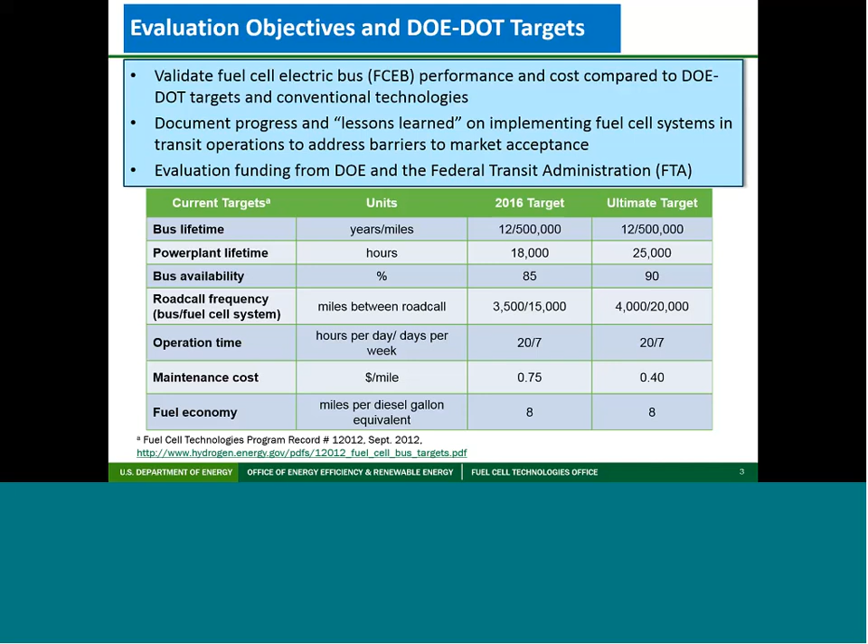We document for other transit agencies the lessons learned, hopefully so that new agencies that are interested in this technology can avoid some of the pitfalls from some of the early adopters. And I'm going to go through data as we move forward that talk about these targets, such as power plant lifetime, availability, the frequency of road calls, and maintenance cost and fuel economy.

Our approach is we're basically a third-party evaluator. We work with the transit agencies, and most of the data we get comes straight from the transit agencies and then some from the manufacturers. We include comparisons to the conventional technologies. In most cases, that's diesel, but some of our fleets don't have diesel baseline buses, so we look at CNG. Occasionally, we'll have diesel hybrids as a baseline as well.

We work with each of the individual sites, and we collect data and then document their experiences, and that builds a database of a number of data items that we have from all these fleets. We publish the individual reports, and then once a year we do an annual status report where we look at the data from all those sites and sort of assess the progress and look at what maybe needs to happen for the technology to continue on that line toward commercialization.

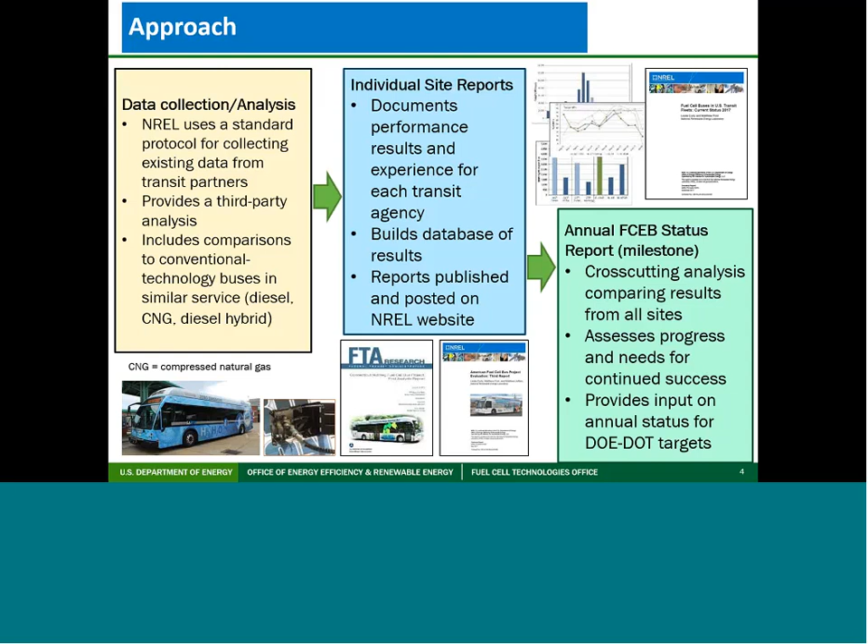So the next few slides, we're going to talk about a data summary from our most recent data. This will also be included in my annual merit review presentation in June. We've got two different manufacturers that we've been working with so far, and this table gives you some specifications from those two manufacturers. One design is a Van Hool-based bus. The power plants were originally designed by UTC Power, and they have a fuel cell dominant system with a Siemens ELFA hybrid system using EnerDel batteries.

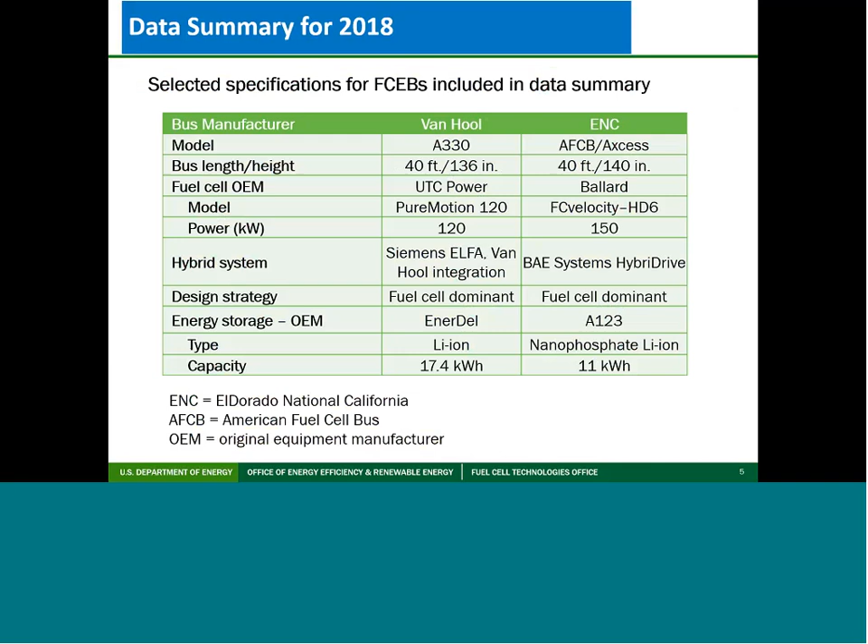The other design that we're looking at is built by ElDorado National on their Axess platform, and that bus was developed under the FTA program, and it's dubbed the American Fuel Cell Bus, which is the AFCB acronym. And that one has a BAE hybrid drive system with a Ballard fuel cell, and it's also a fuel cell dominant system with A123 batteries.

This table shows you the fleets that we've included in the data summary. We've been working with 6 fleets over the last few years, but we don't have data from all those fleets in the following data products. So this shows you who we've been working with, how many buses they have, what design it is, and what data is included.

We've followed the AC Transit buses for 6 or 7 years now, so we've cut down on the data that we've collected on them. It's mostly the fuel cell hours, but we've also included the fueling records, and on the reliability chart we've shown their miles between road call as well.

We have all data on Sunline and Orange County Transportation Authority, and then in the UCI there's a bus at the University of California at Irvine, and then the MBTA bus, we don't have a full data set on those, so that includes fuel cell hours and their fueling records.

And then Stark is our newest fleet. We have not selected a clean point for those yet, so right now we only have the fuel cell hours, but we've got about 4 or 5 months worth of data on those, so they will show up in our next data reports. And I've got the numbers beside the fleets showing our evaluations are funded by either DOE or FTA, and I've indicated which ones are funded by which.

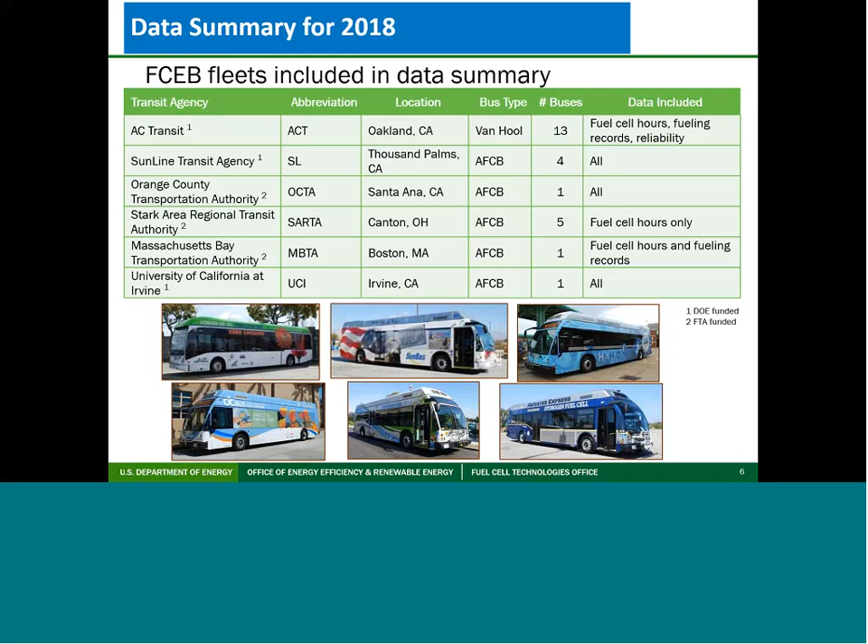So this chart shows you the growth of fuel cell buses in the U.S. over the past few years. We started evaluating some original prototype buses back in 2005, and we're seeing some of those numbers climb now. The nice thing is that the new bus orders are following the standard procurement process, which is definitely needed to have a commercial product. Right now we have 33 fuel cell buses in service.

We are not collecting data on all of those. And then potentially by the end of 2019, once orders that are on the line come through, it could be 71 buses. And I have a note at the bottom about the European fuel cell programs. From the notes that I've seen, we have about 46 active, and there's 313 planned in Europe. And then Asia is also planning some larger fuel cell bus programs. I've seen as many as 400 planned, and with the potential for as much as 2,000 more per year in Korea.

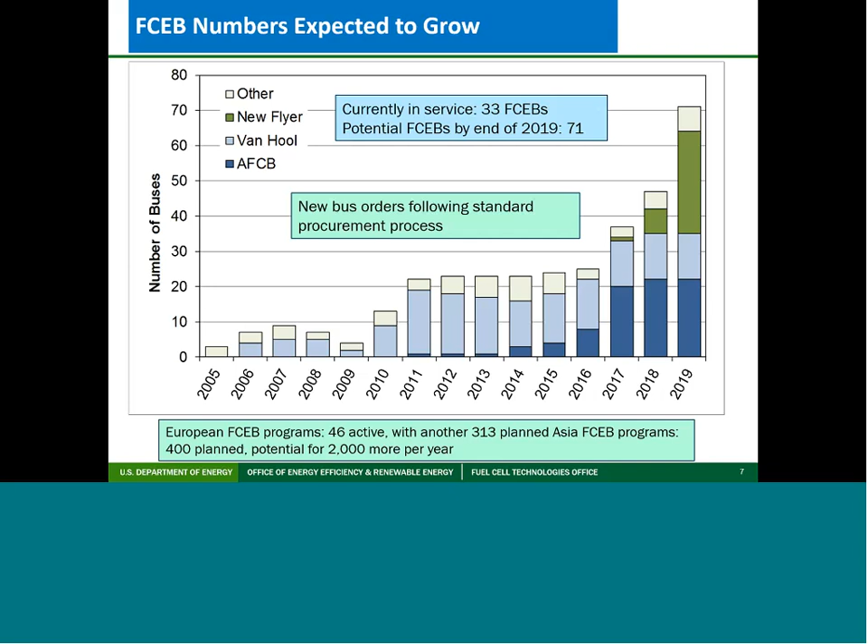One of the most important things to look at is the longevity of the fuel cell power plant. This chart shows you for each of the buses that we are working with, the number of hours that the buses have achieved as of the end of February 2018. There's an interim target of 18,000 hours, and the ultimate target is 25,000 hours.

The idea is that the 25,000 hours will take a bus through half of its life, and then similar to what they might do with a CNG or a diesel bus where they might do an engine rebuild or an engine refresh, the thought would be that that would take the fuel cell to a point in time where they might want to refresh or replace that power plant.

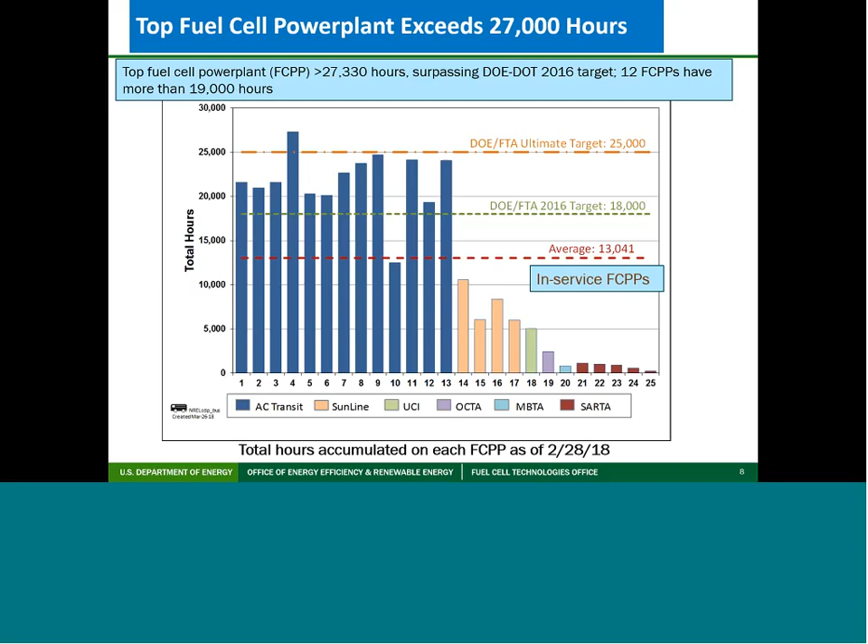We've seen 2 buses now that are over the ultimate target as of March. So I have some more data. This is through February, but we've seen 1 bus go over 27,000 hours, which is a huge accomplishment for these buses. You can see that some of our newer buses have come online, and so they don't have nearly as many hours, and the average for the group as a whole is over 13,000 hours.

Fuel economy, we track in-use fuel economy, but we developed this product last year for our last status report to look at the different designs that we've looked at and the first generation versus second generation. So these box plots show you the first year of data at each demonstration. Fuel economy is very dependent on duty cycle, so to get these numbers we looked at each of our demonstrations, took the first year worth of data and the average fuel economy for the buses for that whole year. So that would also include any summer versus winter driving.

The first generation buses, there were 6 demonstrations of 3 different fuel cell bus designs, and the Gen 2 are 5 demonstrations of 2 different designs. And you can see that from the first generation to the second generation, we've seen a fuel economy increase. And I did put a note on here that the low point of the Gen 1 is the only bus that we've looked at that was not a hybrid electric bus. It was just a strict fuel cell bus, and it got worse fuel economy than the baseline buses.

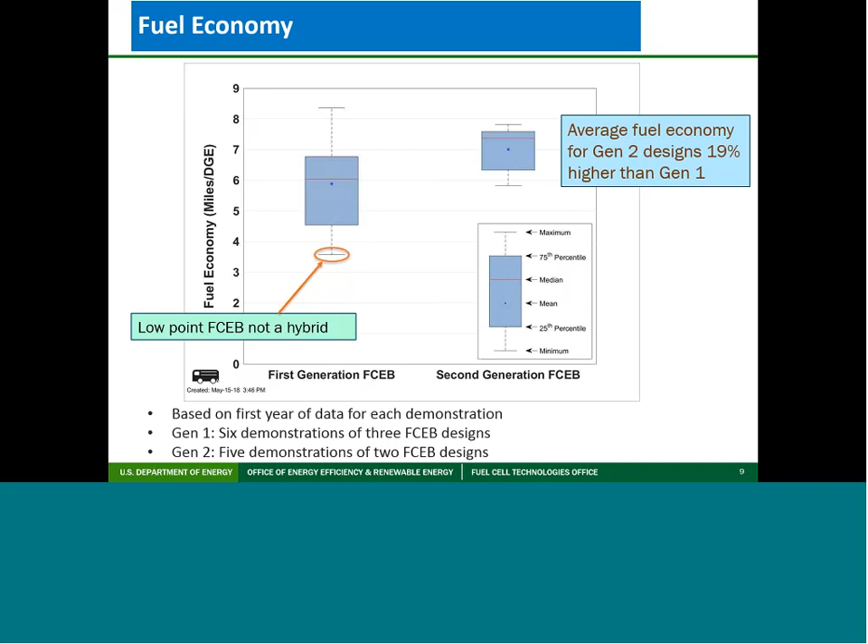While these buses hold, depending on the design, either 40 or 50 kilograms of fuel, the average overall has been about 21 kilograms per fill. We've seen it definitely more than 30 kilograms in a fill, but the average has been 21. Transit agencies will fill the buses during a 6 to 8 hour window at the end of the day, so stations need to be capable of back-to-back fueling. Our stations so far have had no issues with back-to-back fueling.

At least the stations we have now can handle up to 10 or 12 buses. We have seen some issues with having to have a little wait time after the 10th or 11th bus. The goal for an agency is to fuel it in less than 10 minutes. That's typically what they do with a diesel or a CNG bus, and they clean it and do all the prep work while they're fueling the bus.

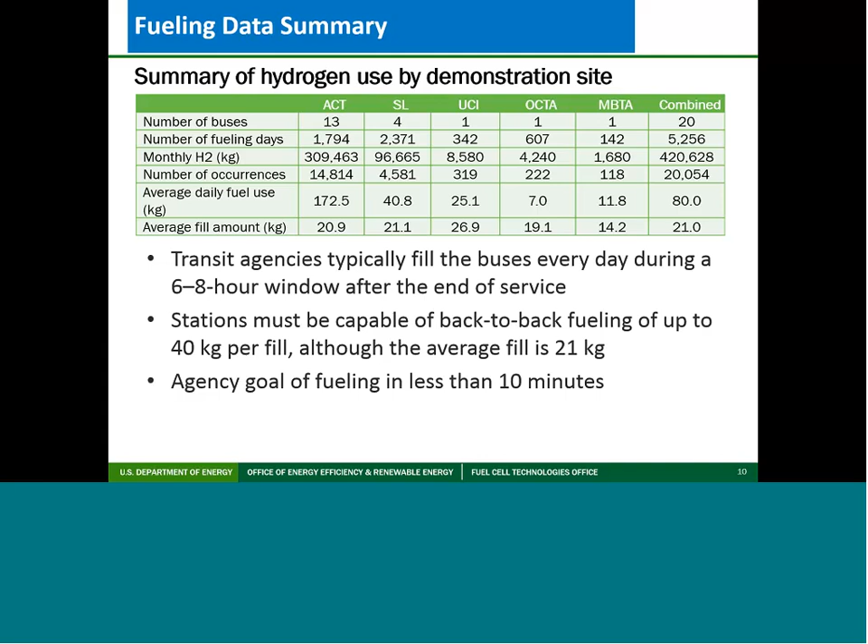Looking at reliability, transit agencies track that as miles between road call, and this chart shows several different lines. Let me explain. The red and the blue lines at the bottom are for the two different designs, the Van Hool fuel cell electric bus and the American fuel cell bus, and that is the overall miles between road call for all chargeable road calls for the bus. So it wouldn't include things like head signs or fare boxes or radios, but it would include things that went wrong with the bus. You can see that the ultimate target is 4,000 miles between road call, and both these designs have risen over time and are both over the ultimate target.

The two lines at the top: the green line is the American fuel cell bus, the fuel cell system only MBRC, and the purple line is for the Van Hool bus. I separated these out. I mentioned we're not collecting as much data on the AC Transit Van Hool buses, but I wanted to show how they have improved in reliability, and part of that really shows how the agency is learning to anticipate problems ahead of time, and so we see that number climbing.

There is some jaggedness to the American fuel cell bus line. Part of the reason is that there is more than one fleet included in that line, and there are only 5 buses, so it's very sensitive to the number of buses. So you get a road call, and if there aren't as many miles, it will drop that number down, so it fluctuates some. We are seeing it rise, and we expect it to continue to rise.

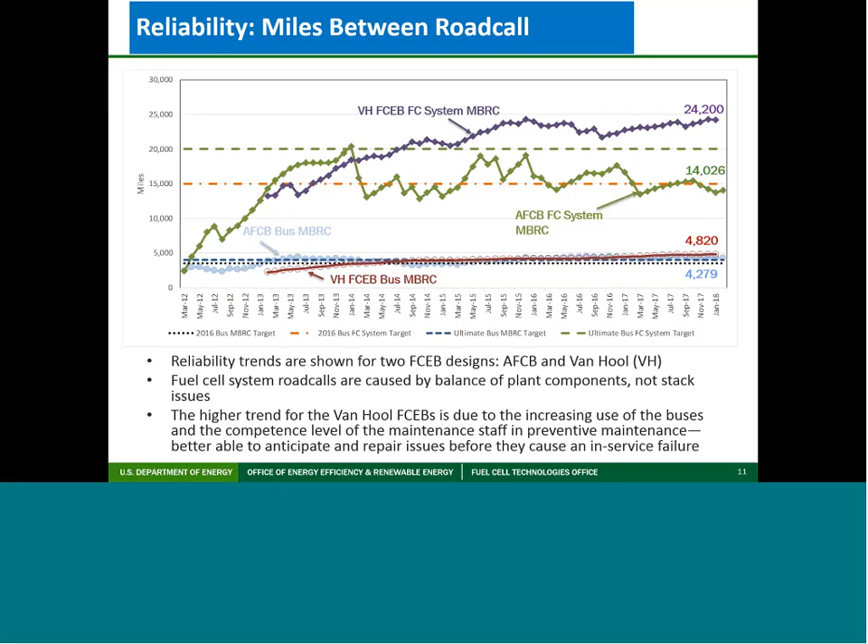Cost is one thing that the transit agencies are very concerned about. This chart shows the fuel cell bus compared to our CNG baselines, diesel baselines, and I've included one of the battery electric bus fleets that we've collected enough data on to present here. The majority of the cost this shows is for labor. Troubleshooting and sometimes training will increase those labor hours. In some cases, for a preventive maintenance, there might be 3 mechanics working on it at the same time. You've got one mechanic teaching the other 2, so we'll have double and triple labor hour cost. As that learning curve goes up, we expect those costs to go down.

As the buses are still under warranty, we don't see those costs. We don't include warranty costs in these numbers. Those are provided by the transit agency or by the OEM, so we won't see those until the buses come out of warranty. Some of the fuel cell buses here are out of warranty, so we're seeing some of those costs increase. The CNG buses here are mostly out of warranty, and so are the diesel buses. The battery electric buses that I have here are just now starting to come out of warranty. As I mentioned, the cost per mile calculation is sensitive to the number of buses in each fleet. The fuel cell electric bus line is 5 buses, the CNG and the diesel are both 10 buses, and the battery electric bus line here is 12 buses.

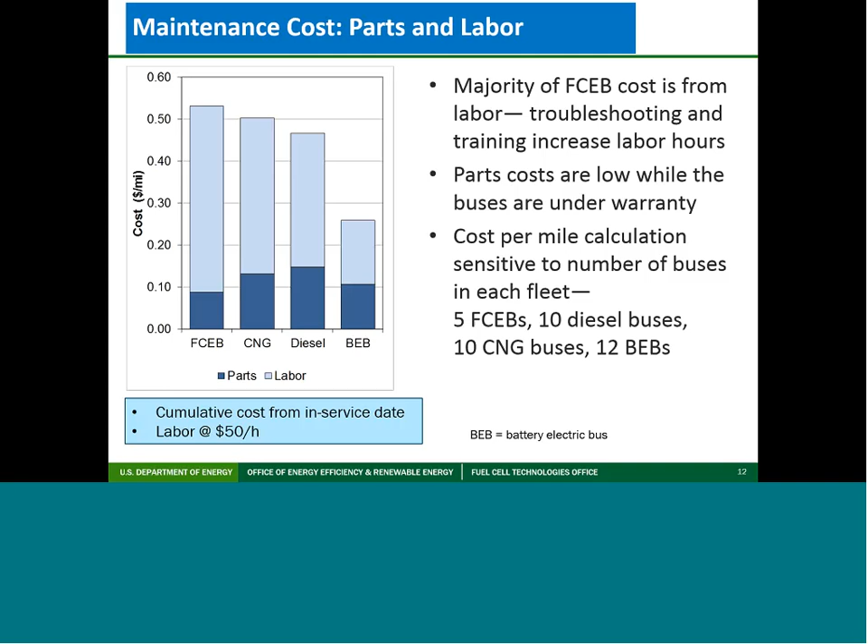If I take those costs and break them down by system, that's what this chart shows. You can see that the highest cost so far within the fuel cell buses is for propulsion-related issues, and a lot of what we've seen are things like cooling system leaks and some low-voltage electrical problems. We've seen problems with the low-voltage batteries that have caused some higher costs. Those are not the high-voltage batteries for the hybrid electric system; they're the lower voltage battery that takes care of some of the other systems on the bus. The fuel cell problem is mostly balance of plant issues. We've had some other bus issues with the air compressor and suspension.

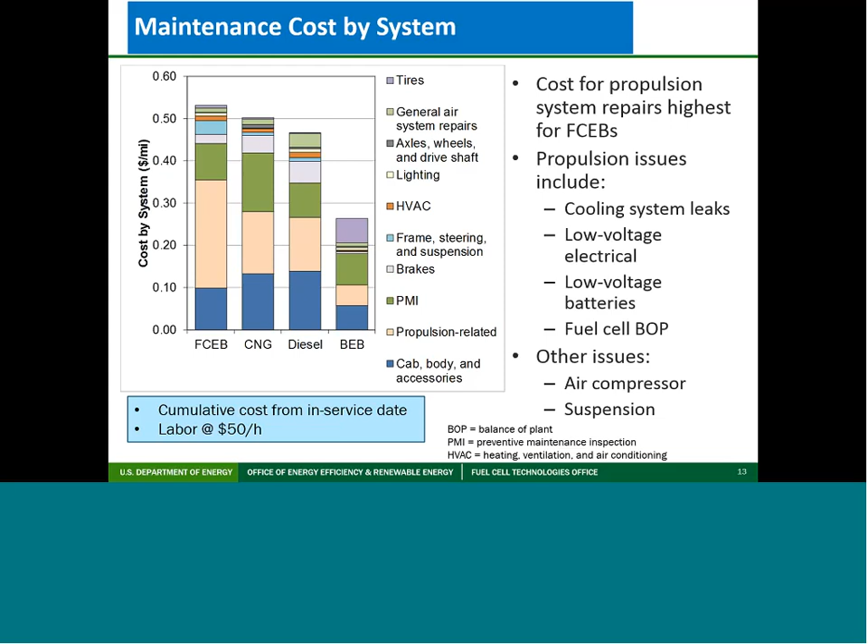In this chart, I wanted to show some maintenance cost trends over time. One of the questions I've been asked is how does the cost over time compare to conventional technology? So this chart shows the cumulative maintenance cost from the start of service for a number of different fleets. We've got the fuel cell bus fleet, which is the American fuel cell bus, in the darker blue.

Then I've got our diesel fleet in the light blue with the triangles, and then we've got two different CNG baseline fleets shown here, the circles with the teal blue and the orange, and then the battery bus fleet that we've been working with in the green. And the numbers correspond to where we see the reasons for those costs.

So if you look at the number 1, that's the introduction of the technology. They're not operating the buses on as many miles. They're starting to break them in, and they've got some higher costs because it is an early introduction with fewer miles. Then as you get to stage 2, you see the miles are increasing on the buses. They're getting them in service. Most of these repairs are handled under warranty, so you see the cost drop as they gain miles and they're not accumulating that much cost.

Then section 3, you can see some steady increase, and that trend is based on learning curve. The agency staff are starting to take on some of the maintenance work and some of the preventive maintenance and repair, and they're learning to troubleshoot, so you see that cost climb with the labor as they're learning how to take care of those buses. And then when you get to stage 4, you're seeing that cost decrease. The mechanics are becoming much more familiar with the technology, and so you see those costs decrease.

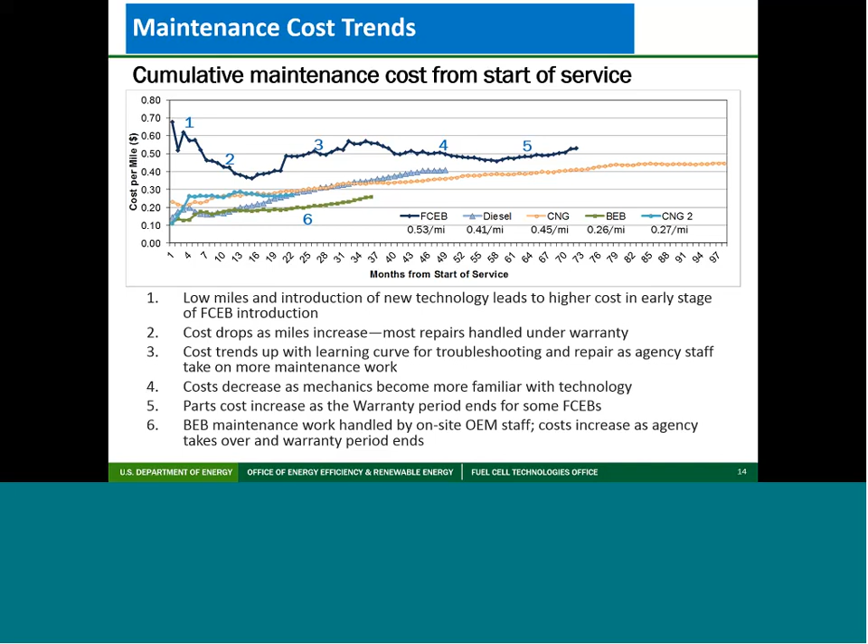Some of the technical issues that are affecting the cost: understanding these issues helps guide early R&D needs. I mentioned the fuel cell system; the majority of things that we've seen were due to balance of plant, things like air handling, blowers failing, cooling pumps, and plumbing. Sometimes they find leaks in that plumbing and they're hard to troubleshoot. We've seen some electrical system problems. With these low voltage batteries, some of the electric accessories like the fare box and the radios and the cameras cause a continual drain, so we're seeing some shortened battery life. I'm trying to investigate what that means for these buses. We're also seeing that issue with the battery buses.

Then cooling system leaks in some cases if they're in hotter climates. For instance, some of our buses are at Sunline Transit Agency. It's a hot climate there. It's kind of hard to locate a leak because usually you locate a leak when you see water and it evaporates really fast in the desert. So that's made it very challenging to locate some of those leaks. And then added labor hours for troubleshooting problems is something that we've seen in early stages, and we expect that to go away as the mechanics become more familiar.

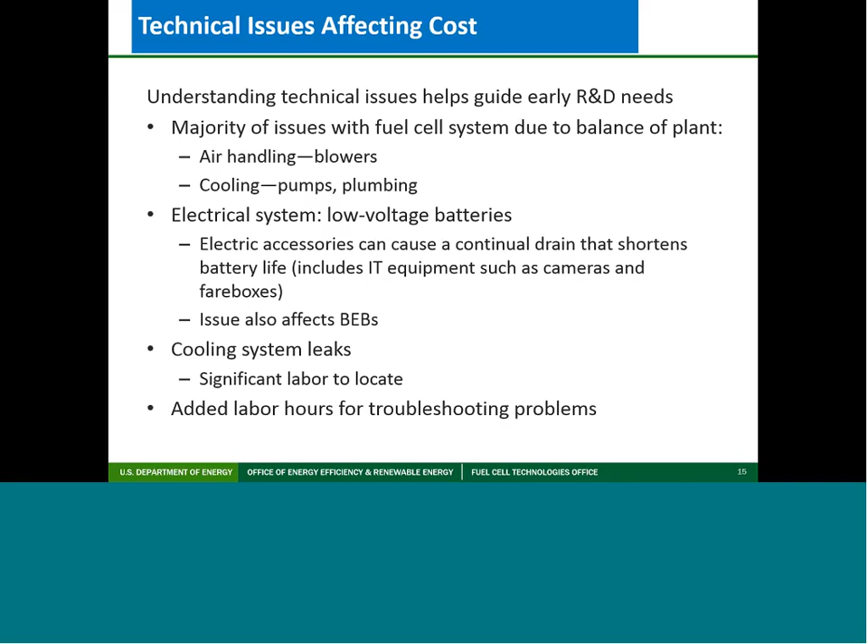Remaining challenges and barriers: we'd like to see a robust supply chain for the components and parts to lower that cost and the downtime. We are seeing this happen now. Some of our manufacturers are standardizing with their conventional bus components, and we expect that to lower the cost and to help with parts availability. Multiple component suppliers will be very helpful. In some cases, we've seen component suppliers go out of business, and then the transit agency is stuck with a bus, and they have a hard time finding an alternate source for those parts.

Deploying larger fleets. Some of the agencies that we've worked with have a one-bus fleet in a large fleet, and that makes it really challenging. It requires a commitment, and it's really easy if you've got one bus that's a specific design and everything else is different.

It's easy just to let that bus sit if it has a problem, so that affects the availability numbers. While if they were a little more committed, they might find it easier or quicker to fix the bus and get it back in service. So that affects our availability numbers over time.

And then we'd like to see the cost come down, and we expect that as the numbers of buses increase. You'll see some reduction in capital cost, and then operating cost will come down as the transit agency staff become more familiar. Parts and labor also increase the cost as the fleets get past that warranty period. Then fuel cell buses are also competing with other zero emission technology, so that's a challenge for fuel cells when you're looking at battery bus fleets that are becoming very popular and getting ordered all over the country.

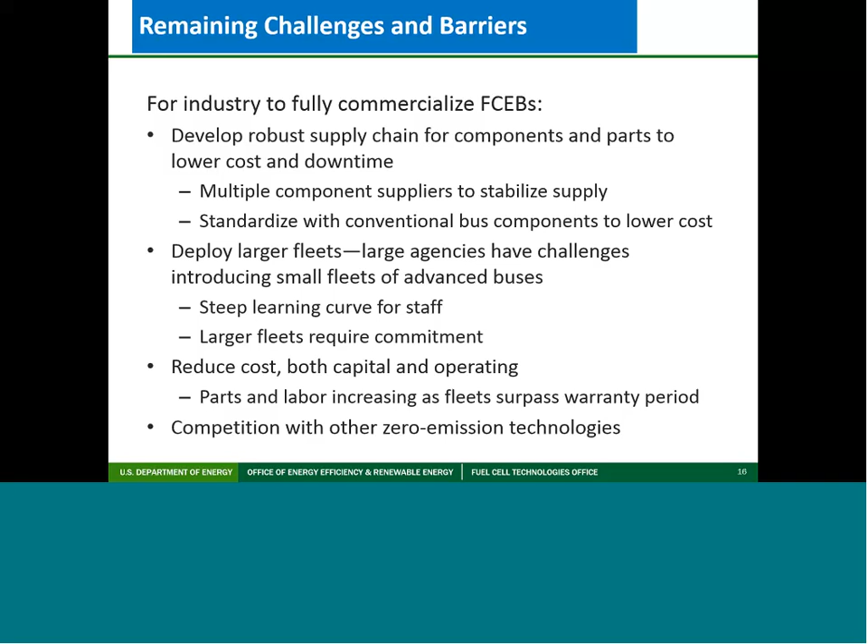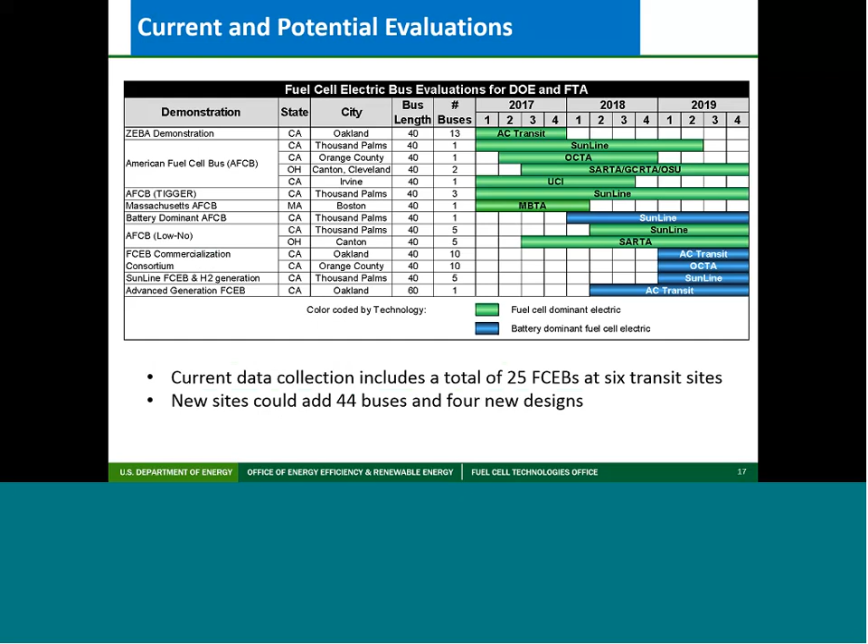This last chart summarizes the progress toward meeting those targets. So if you look at the 3 columns to the right in the orange color, that gives you the interim target, the ultimate target, and we tag whether that target was met or not. And then the lighter blue on the left-hand side is our average from 2017. And then the 2 darker blue bars that say 2018 fleet max and 2018 fleet average. That's the current numbers through the end of February of this year.

So the 2018 fleet max, what that is if we look at all of our buses as a whole, what was the maximum amount? We have some very new buses. This shows, our older buses, the bus lifetime is almost 200,000 miles. Power plant lifetime, our highest power plant is over 27,000 hours. The bus with the highest availability is 90%, and then the road call frequency. So that shows you just kind of the maximum that we're seeing as a whole.

And then you look at the 2018 fleet average, and that's if you take all of those 25 buses as a whole, what is the average for those? And you can see that we've met the target for power plant lifetime. We've met the ultimate target with 1 bus, and then we've met the interim target with a number of buses. We've met the road call frequency with the AC Transit buses, and then I should probably put down that the range in miles is close to being met as well.

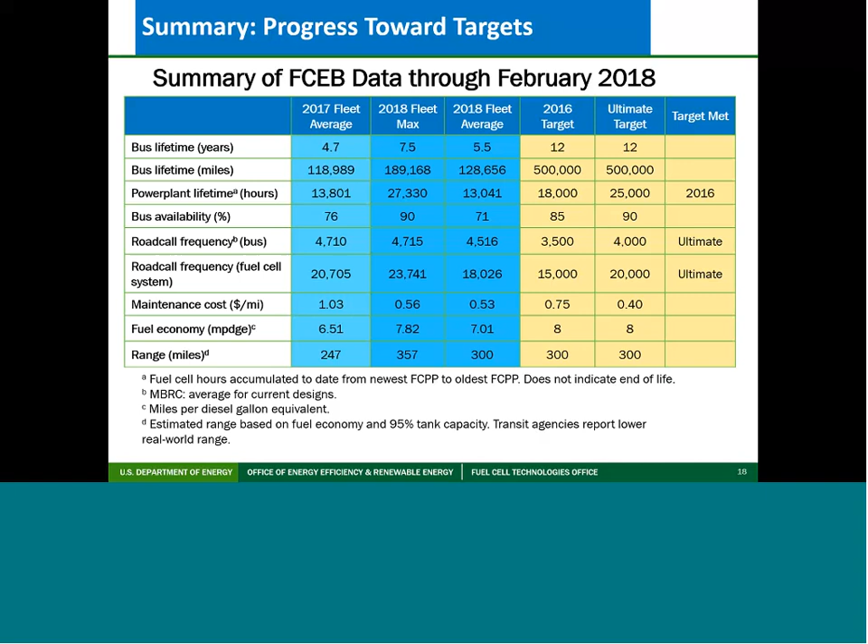Then to acknowledge our funding partners, I mentioned the Fuel Cell Technologies Office within EERE provides us with funding for some of our fuel cell bus fleets, and then the Office of Research, Demonstration, and Innovation that's within the DOT's Federal Transit Administration also provides money for us to do both fuel cell and battery electric bus fleets. And that was the end of my presentation.